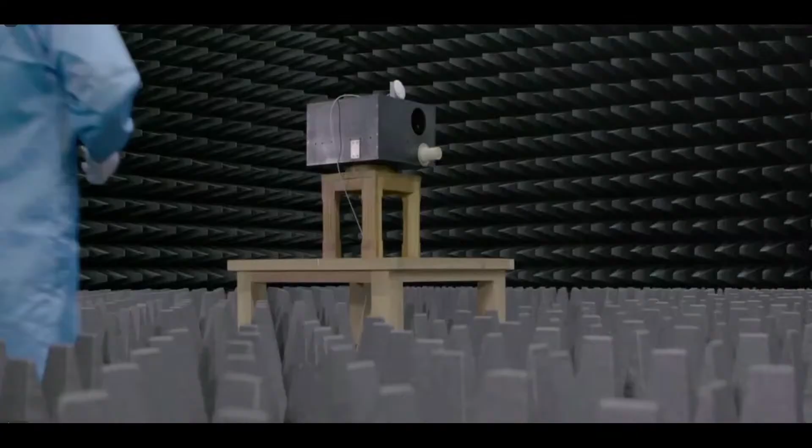Riset adalah kekuatan untuk kita bisa menembus segala keterbatasan. Inovasi adalah visi yang kita segerakan untuk masa depan. Kita tidak bisa sendiri. Kita harus bersama untuk membuatnya menjadi nyata.

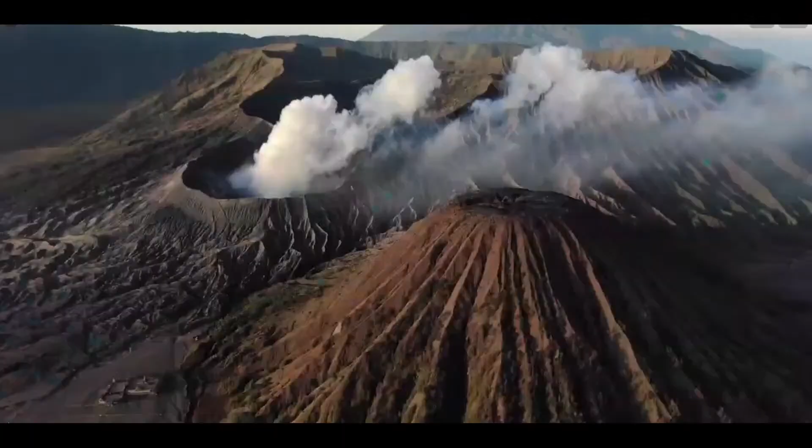Kita tumbuh di bumi Indonesia, tempat yang magis dan penuh keajaiban. Terbentang di antara dua benua dan samudra, kaya akan keanekaragaman kultur dan biodiversitas. Indonesia dan kita adalah paduan yang dibutuhkan untuk mewujudkan visi besar di masa mendatang.

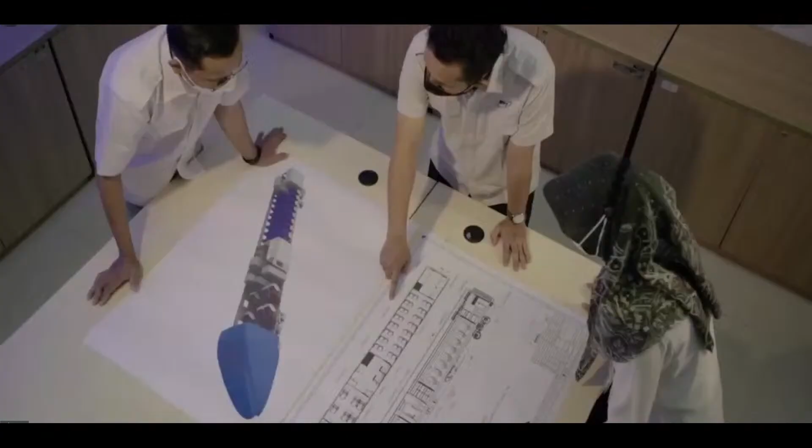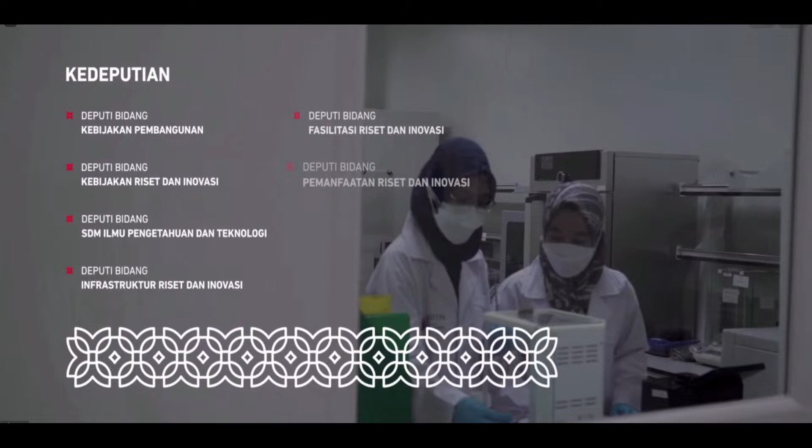Layaknya sebuah orkestrasi, Badan Riset dan Inovasi Nasional atau BRIN hadir mengharmonisasikan berbagai kegiatan penelitian, pengembangan, pengkajian, dan penerapan, serta mensinergikan riset dan inovasi di Indonesia. Membentuk ekosistem yang terdiri dari 7 kedeputian, 12 organisasi riset, dan 85 pusat riset, di antaranya:

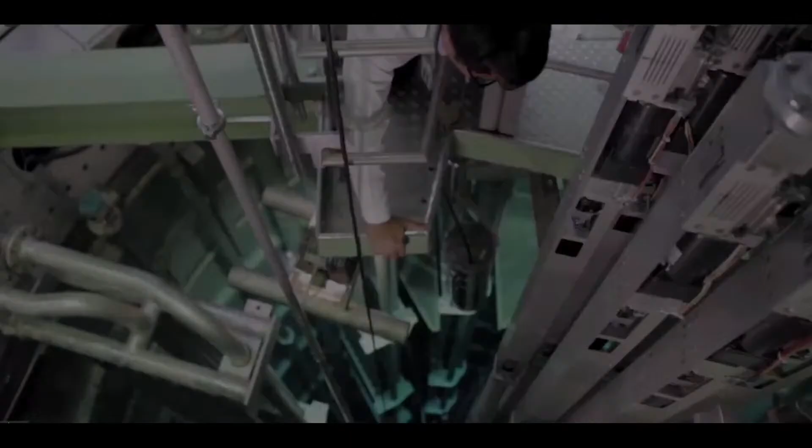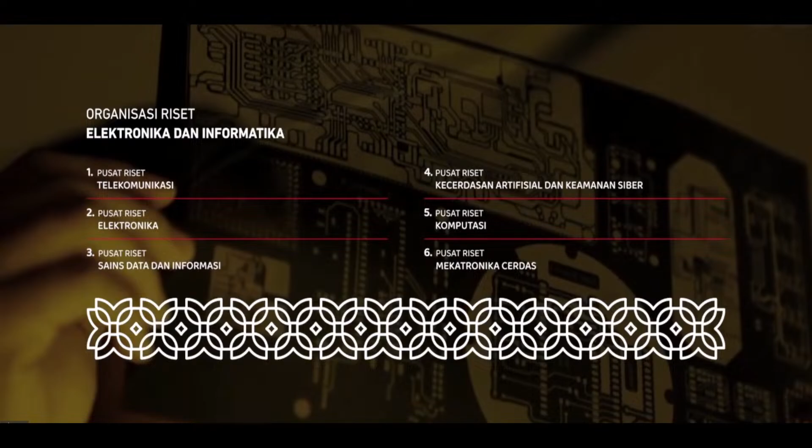Organisasi riset penerbangan dan antariksa, organisasi riset tenaga nuklir, organisasi riset energi dan manufaktur, organisasi riset kebumian dan maritim, organisasi riset hayati dan lingkungan, organisasi riset elektronika dan informatika, organisasi riset ilmu pengetahuan sosial dan humaniora, organisasi riset arkeologi, bahasa dan sastra, organisasi riset kesehatan, organisasi riset nanoteknologi dan material, organisasi riset pertanian dan pangan, organisasi riset tata kelola pemerintahan, ekonomi, dan kesejahteraan masyarakat.

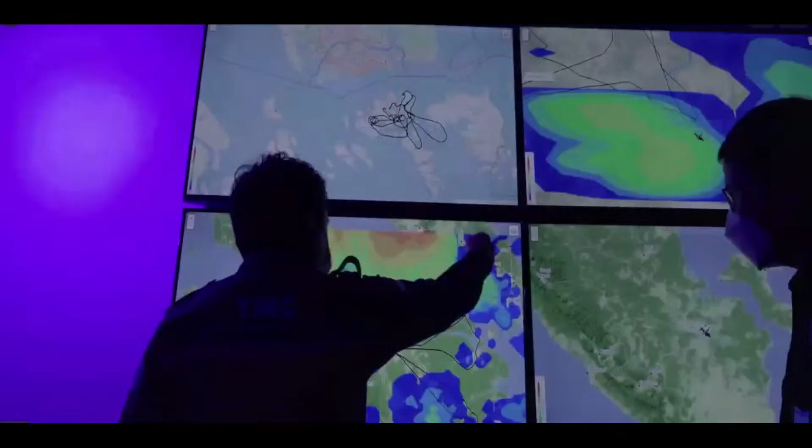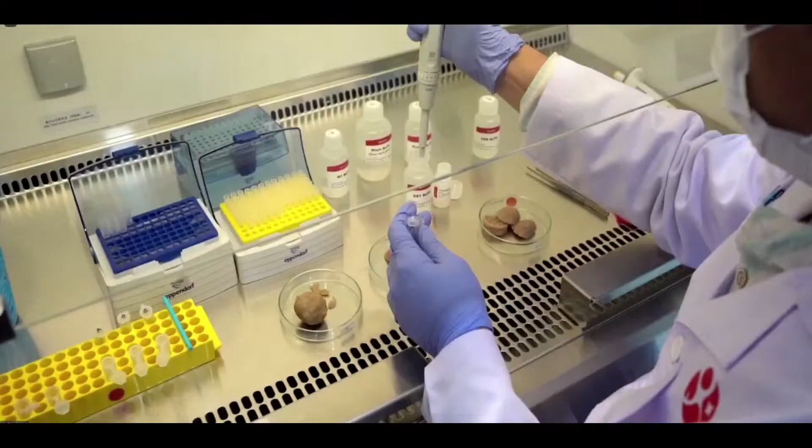BRIN juga mendorong riset dan inovasi menjadi ekosistem Indonesia yang maju dan berkembang dengan 2 sasaran utama. BRIN menyadari potensi luar biasa putra-putri bangsa dalam bidang ilmu pengetahuan dan teknologi. Untuk itu, berbagai kebijakan riset dan inovasi diarahkan untuk menghadirkan kompetensi SDM iptek terbaik, menghasilkan berbagai program unggulan sebagai bentuk komitmen BRIN terhadap periset, inovator, serta masyarakat luas dari berbagai disiplin ilmu di seluruh negeri.

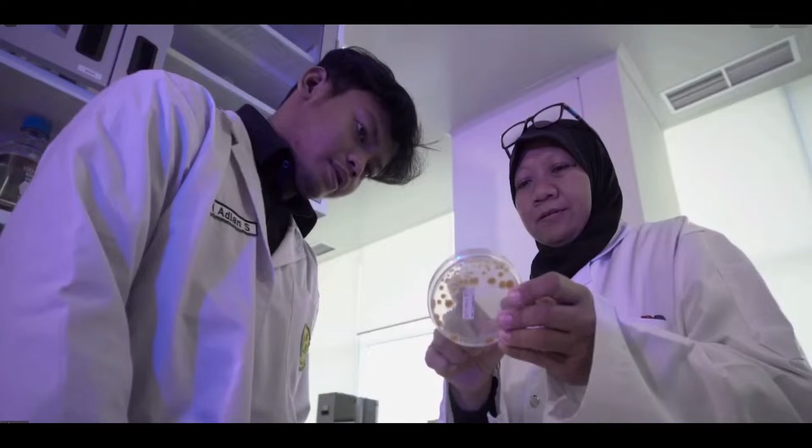Peningkatan kualitas ekosistem riset dan inovasi di Indonesia juga tercipta melalui kolaborasi dengan berbagai kementerian, lembaga, industri di dalam negeri, dan pemerintah daerah, di antaranya dengan dibentuknya Badan Riset dan Inovasi Daerah atau BRIDA. Selain itu, kerjasama dengan berbagai lembaga riset di luar negeri juga terus didorong melalui partisipasi aktif sebagai anggota dalam berbagai organisasi dan forum internasional.

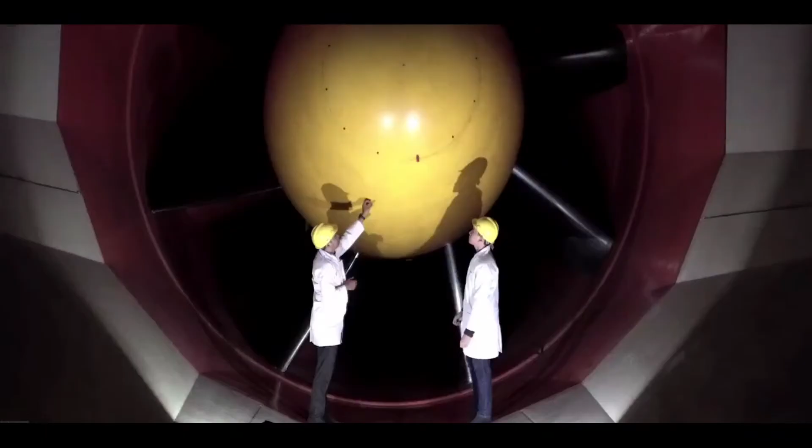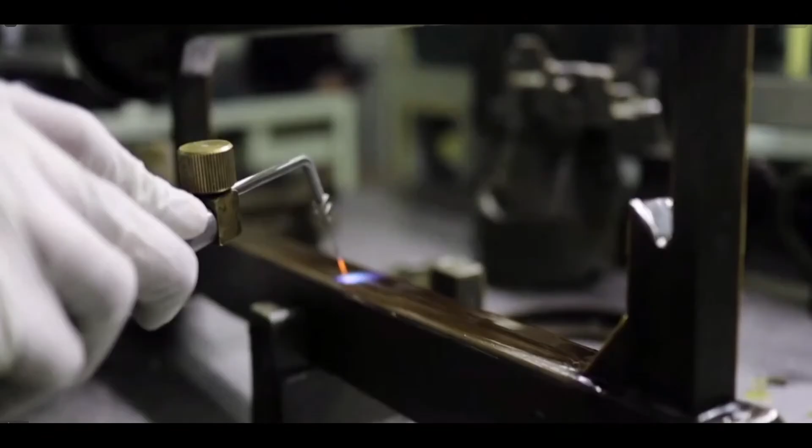BRIN menata alur riset sehingga lebih efektif dan efisien dengan mengintegrasikan sumber daya manusia, infrastruktur, dan anggaran dari berbagai lembaga litbangjirap. Berorientasikan prioritas riset nasional, BRIN melakukan evaluasi secara komprehensif untuk setiap percepatan yang tengah berjalan.

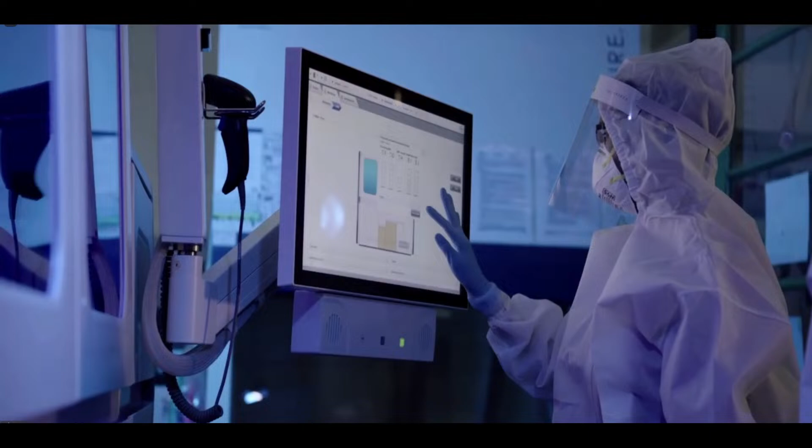Upaya tersebut didukung melalui pengelolaan berbagai fasilitas riset dan inovasi yang tersebar di 17 provinsi di Indonesia, dan akan terus bertambah mengikuti perkembangan kemajuan iptek.

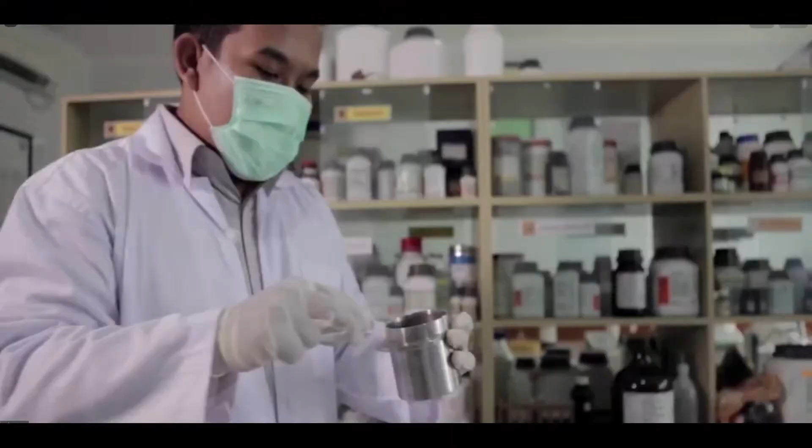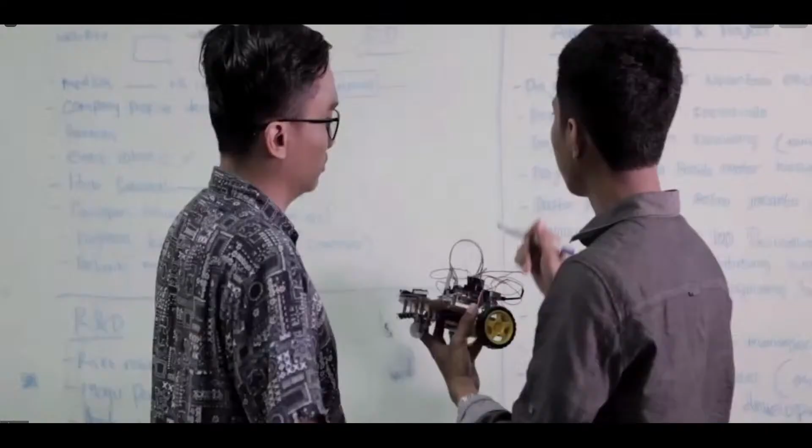BRIN terus meningkatkan kontribusi riset dan inovasi terhadap pembangunan nasional melalui pembangunan dan revitalisasi 4 kawasan sains dan teknologi atau KST. Sebuah kawasan terintegrasi berupa fasilitas laboratorium riset, laboratorium pengujian, fasilitas industri baik startup maupun UKM pada skala kecil atau uji coba, ruang kantor tenan, coworking space, ruang pertemuan, ruang pameran, dan fasilitas pendukung lainnya.

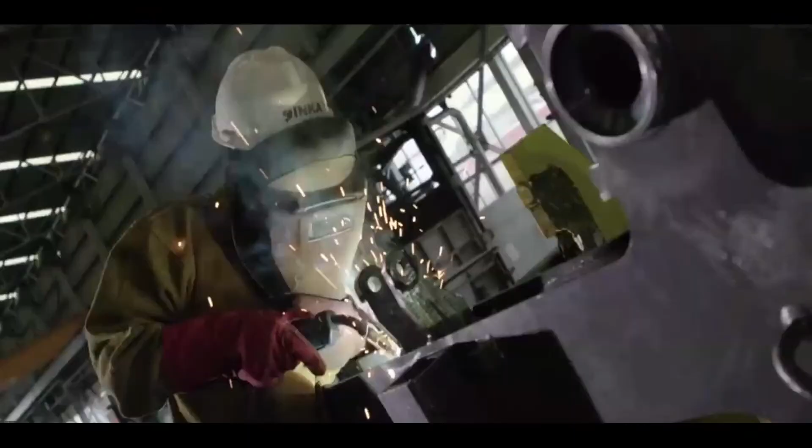BRIN hadir untuk mewujudkan cita-cita menuju Indonesia Emas 2045, melalui konsolidasi sumber daya iptek, menciptakan ekosistem riset, dan fondasi ekonomi berbasis riset, menjadikan Indonesia sebagai rujukan dunia dalam pengembangan dan pemanfaatan ilmu pengetahuan dan teknologi, kebijakan, serta kemanfaatan bagi umat manusia.

Alam adalah sumber inspirasi. Ilmu adalah fondasi dan mengamalkannya untuk kemajuan bangsa.

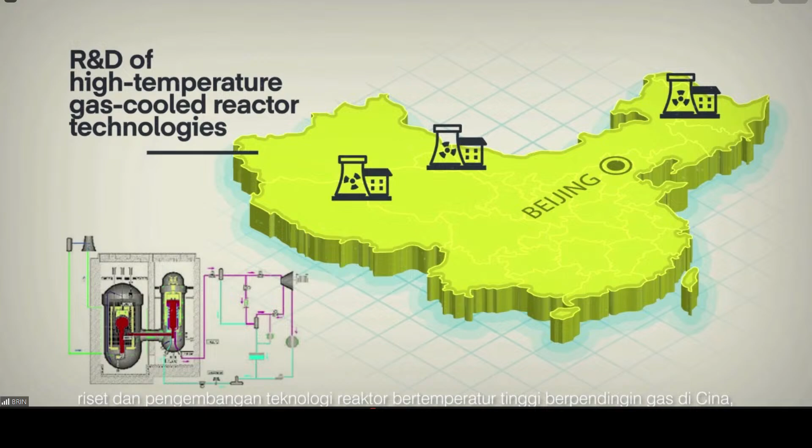Dr. Sun has played a pivotal role in the research and development of high-temperature gas-cooled reactor technologies in China, leaving an indelible mark on the country's nuclear landscape. His main interests lie in the realms of advanced nuclear reactor technologies and nuclear safety.

A former deputy director of the Institute of Nuclear and New Energy Technology, he has also held senior managerial positions in the nuclear industries.

Internationally, Dr. Sun's influence extends to prestigious roles such as serving as a member of the International Atomic Energy Agency's Technical Working Group of Gas-Cooled Reactors, member of the expert group of the Generation IV International Forum, and director of the Nuclear Power Division of the IAEA.

Currently, as a professor of nuclear engineering at Tsing-Hua University, a member of the expert committee of the China Nuclear Energy Association, and a member of national expert committees for ecological and environmental protection and nuclear safety, Dr. Ing. Yuliang Sun continues to shape the future of nuclear technology with unwavering dedication.

Meet Dr. Jun Sun, a distinguished expert in engineering thermophysics and power engineering from the School of Aerospace at Tsing-Hua University in Beijing, China. In 2009, he achieved his PhD and embarked on a remarkable journey at the Institute of Nuclear and New Energy Technology, Tsing-Hua University.

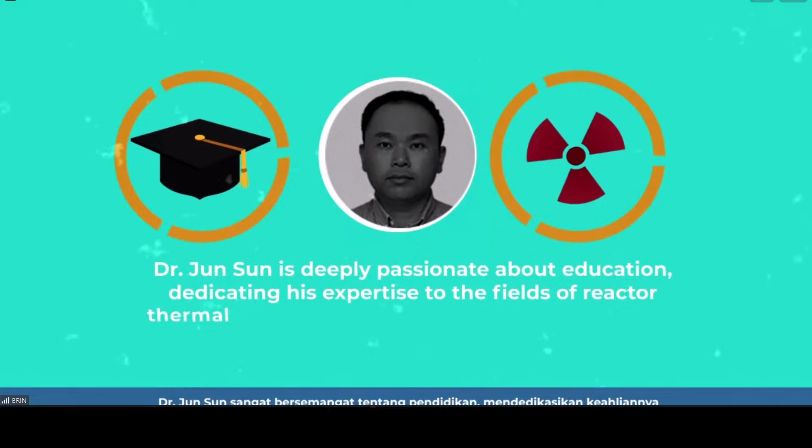Dr. Jun Sun is deeply passionate about education, dedicating his expertise to the fields of reactor thermal hydraulics, nuclear reactor simulators, and advanced nuclear system designs. As an associate professor of nuclear engineering at Tsing-Hua University, he not only imparts knowledge but also serves as a guiding force for aspiring engineers.

Beyond his academic role, Dr. Jun Sun is an active member of the Nuclear Reactor Thermal Hydraulics Branch Council, Chinese Nuclear Society, and proudly represents China in the Education and Training Working Group at the Generation IV International Forum. With his relentless dedication to research and development, Dr. Jun Sun continues to shape the future of nuclear technology in China, leaving an indelible mark on the global stage.

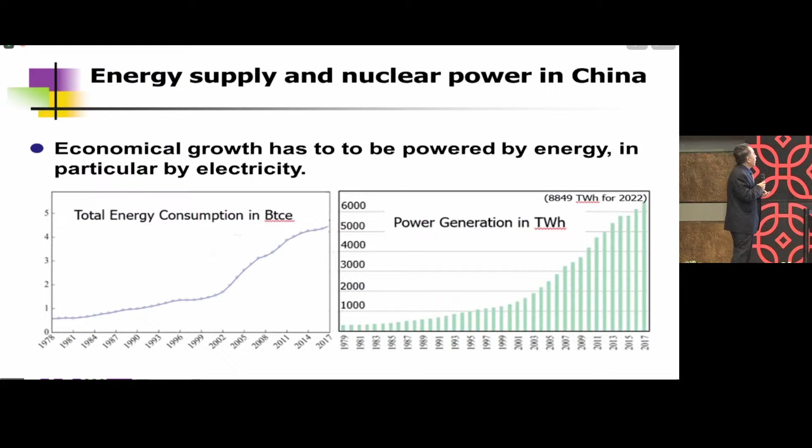Now, securing such a large amount of energy supply faces many challenges. First is to meet the energy demand—you have to have a lot of energy resources to supply that amount. Then there's energy security, to secure the energy supply. Over the years, about 20% of China's energy supply has had to be imported, so we want to be sure this energy supply is always secured.

Thirdly, we have a lot of pressure and challenges in terms of environmental protection and carbon dioxide emission control. This requires great restructuring or structural optimization of the energy supply spectrum. China still depends heavily on coal for energy supply and power generation, and this has to be changed or optimized from the viewpoint of carbon dioxide emission control and zero emission targets.

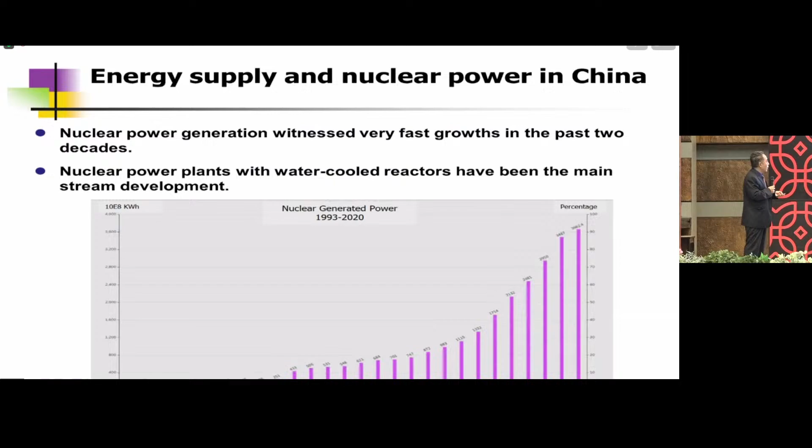Now, some concrete numbers about nuclear power plants. By September this year, 55 nuclear units are under operation, with a total installed capacity of 57 gigawatts, contributing about 4.87% of the total generated power this year from January to September. Also by that time, 24 nuclear units are under construction with a total capacity of about 28 gigawatts, so certainly China has the largest number of nuclear power plants under construction.

And here I think I should congratulate the nuclear industries in China. They have been very successful in terms of good performance building and operating nuclear power plants. We also have today representatives from the nuclear industries—congratulations to them.

Now for the future, it is expected that by 2035, nuclear power may take up to about 10% of total power generation in China, with installed nuclear generating capacity well beyond 100 gigawatts. That is almost certain if nothing disastrous happens in the meantime, for example a severe nuclear accident. If nothing like that happens, nuclear generating capacity will go beyond 100 gigawatts, making China the largest nuclear power generation country.

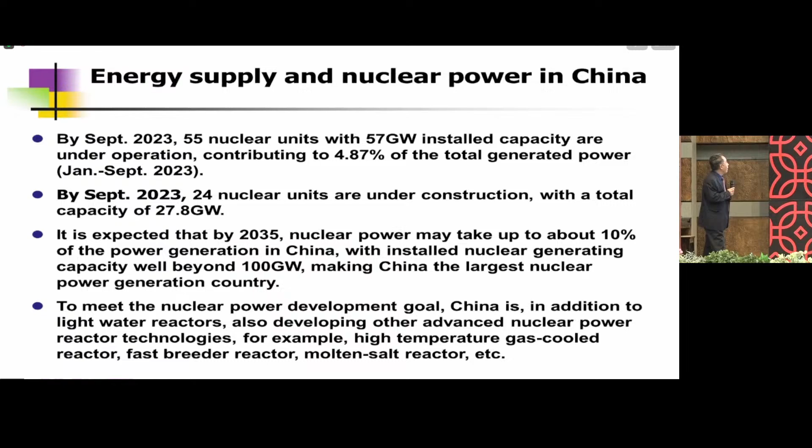These are two very different technologies. What they have in common is they all use uranium dioxide as the original nuclear fuel material. But with the light water reactor, the uranium is cladded by metallic material. With the gas-cooled reactor, the uranium dioxide is cladded by ceramic materials, pyrocarbons, silicon carbide. For coolant, there you have light water, here we have helium. Neutron moderator, there is also the light water, here is graphite. Core structure material within the reactor, there is metal, and here is graphite. So I think we can say these are two very much different nuclear power reactor technologies.

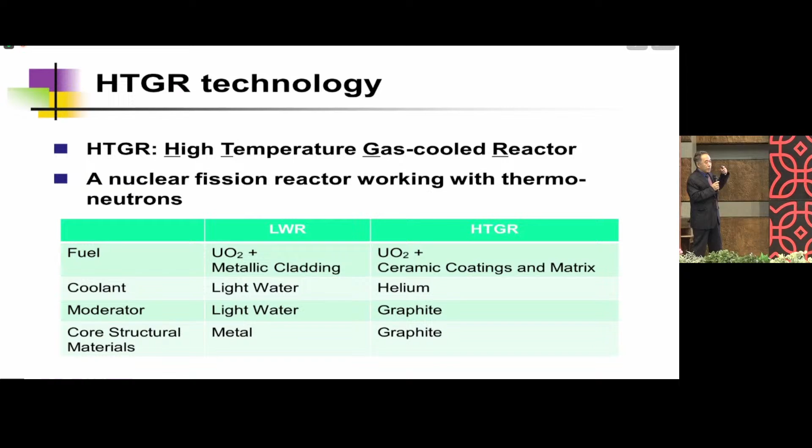The kernel I mentioned is now uranium dioxide, but it could also be other forms of nuclear fuel, with thorium or with uranium-plutonium mix. The three layers we usually talk about are the pyrocarbon layer, the two yellow layers of pyrocarbon, inner pyrocarbon layer, outer pyrocarbon, and the silicon carbide layer in between. These layers are strong enough to retain all the fission products, all the radioactive materials within the coated particle.

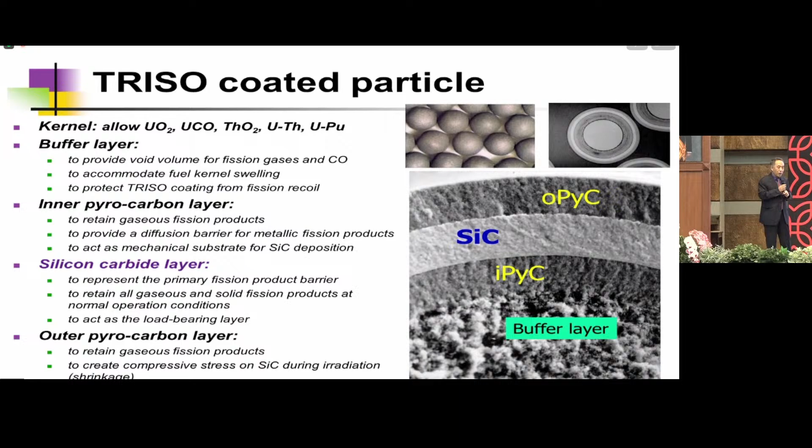These fuels are full ceramic, high temperature resistant, and in normal operation right now, the temperature specification is 1200 degrees centigrade, and in accidental situations, it can stand up to over 1600 degrees centigrade. Within this temperature domain, these coated particles demonstrate very good performance in terms of fission products retention. But it's a different fuel technology, so you need a different fuel manufacturing technology in comparison to the light water reactor fuel technology.

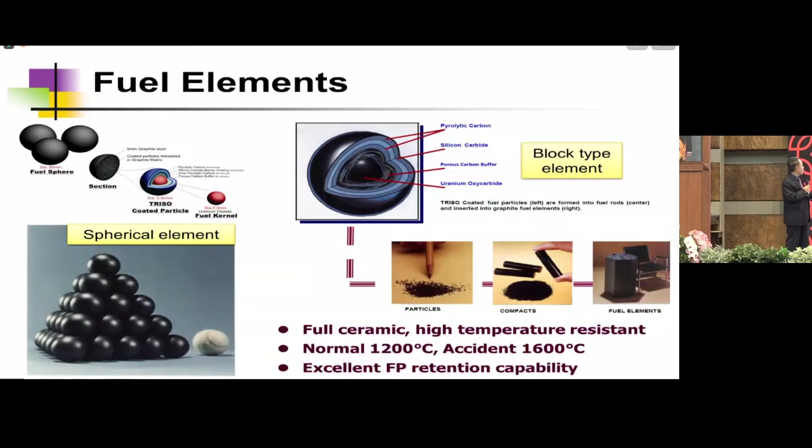So these two reactor fuel element technologies are pursued both worldwide: the spherical fuel element and the prismatic fuel element. The spherical option is pursued more in Germany and currently in China. The prismatic option is pursued more in the United States and in Japan.

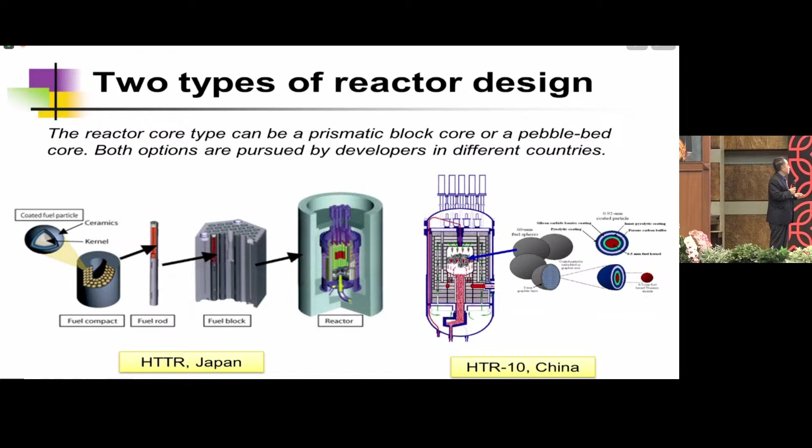Now, the next most important material, helium, working as coolant through the reactor. It's a good gas coolant for reactor application because it is chemically inert, it is not corrosive, it is a single phase gas, stable with varying temperatures, and in terms of neutronics, it is transparent. It does not have a role to play in the neutronic balances, does not absorb neutrons much, and does not moderate neutrons much.

Now the next important material is graphite. Graphite is also a relatively widely used nuclear material, as neutron moderator and as core structure. It has very low neutron capture cross sections, does not absorb neutrons very much, but it has a good neutron moderation capacity, making these neutrons fly much slower.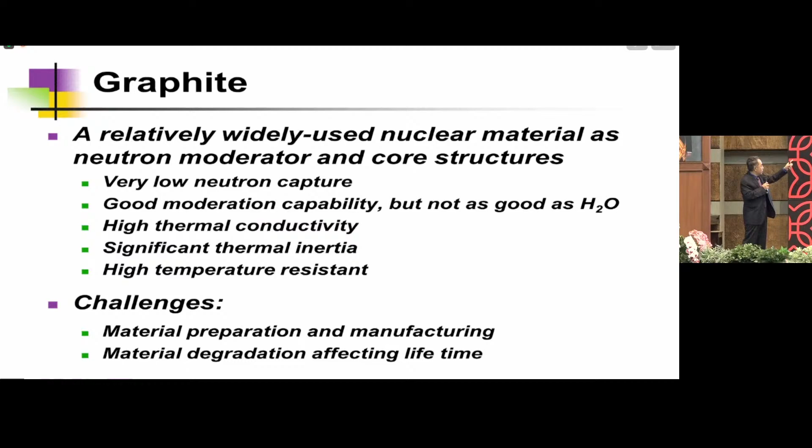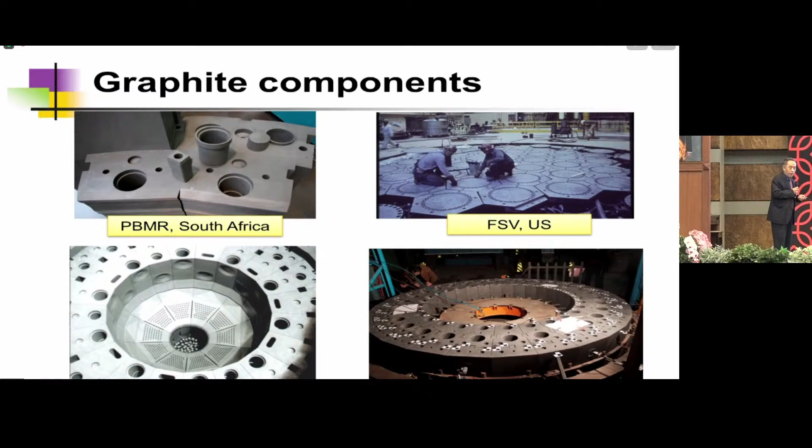From these basic technological choices, we can make some conclusions about the generic technological features of high temperature gas cooled reactors. Almost all of these features come from the selection of materials.

First, a uranium-helium-graphite system can resist high temperature, so you can realize high temperatures from reactor operation. Typical temperature range is 700 to 1000 degrees centigrade. Because of these high temperatures, if you use it for power generation, the power conversion efficiency will be much higher.

These high temperatures also allow for process heat applications at various temperatures. Now, one important neutronic aspect is such a system has a strong negative neutronics feedback effect, which means if you have something abnormal or accidental inside the reactor core, the reactor tends to shut itself down.

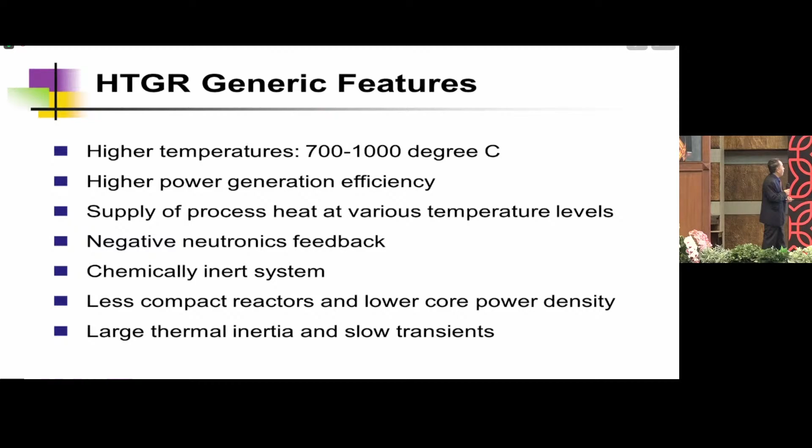Helium gets into the reactor at 100 degrees centigrade and out of the reactor at 2000 degrees. But it's a scientific proposal - that is what scientists can do.

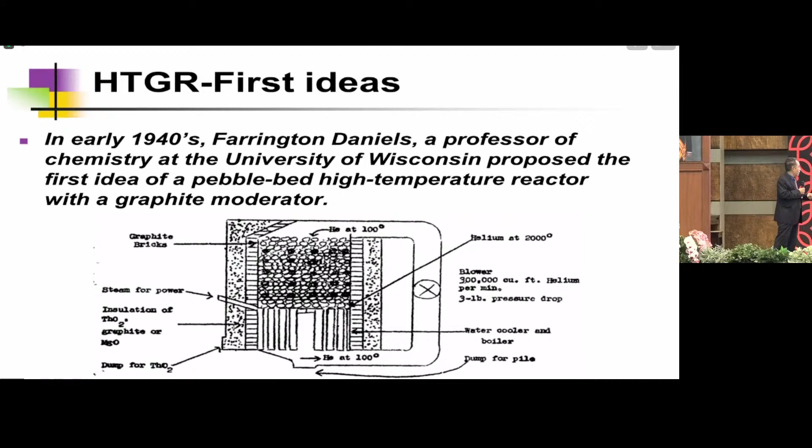With this, I'd like to say high temperature gas cooled reactor has been a concept, a technological option in the world through the years, worldwide. A number of high temperature gas cooled reactors, either testing reactors, experimental reactors, or nuclear power plants, have been built in Britain, Germany, and the United States - even from testing reactors to industrial power plants at the level of about 300 megawatts were built and operated.

Unfortunately, these high temperature reactor facilities or power plants came to a close - almost every facility closed before 1990. After that, Asia took up that technology and started putting resources into its development.

China built a test reactor, and Japan also built a test reactor. Japan's reactor is called HTTR, and the Chinese one is called HTR-10. I will not go into the design specifications more specifically, because I understand you don't wish the presentation to be too long.

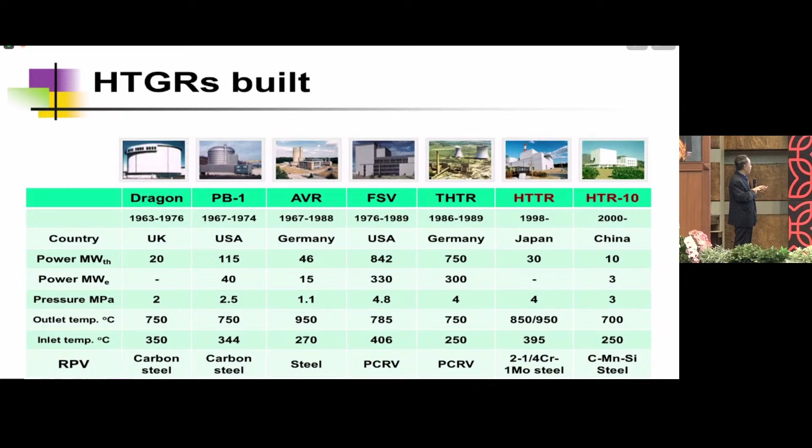I think we can say, or it is a fact, that gas-cooled reactor development has not been as successful as light water reactor technology. They were built in the 1960s and 1970s, operated until the late 1980s, and then came to an end in Germany and the United States, the two primary countries that had spent a lot of resources on this technology's development.

There are complicated reasons for this historical fact, but one important factor is the Three Mile Island accident at the end of the 1970s, in 1979. After that accident, in the early 1980s, gas-cooled reactor people, both in Germany and the United States, thought carefully about how to make nuclear power plants safer. They came up with the modular concept, the modular HTGR concept, to avoid an accident like Three Mile Island, and to avoid a nuclear power reactor having a core melt.

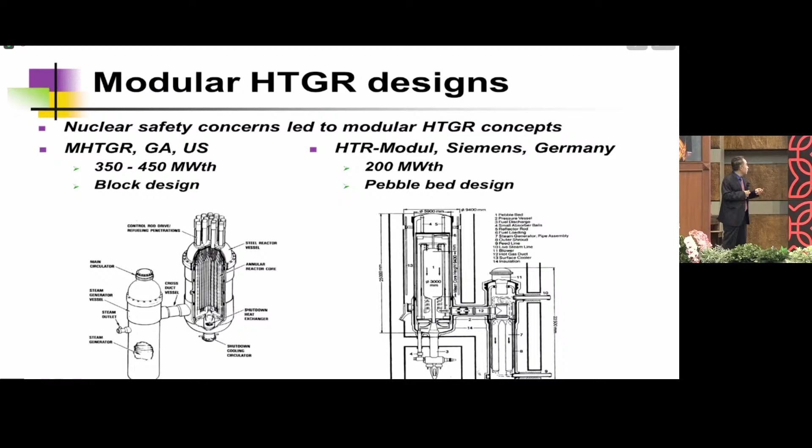Now, what are the key technical features of the modular gas-cooled reactor design proposal? The first most important thing is the reactor would have a lower power rating, lower power generating capacity. It will also have a low power density.

The reactor will have a slim configuration of the reactor core itself. These are basically design choices to allow the reactor heat, after it is shut down, to go out of the reactor by itself, to eliminate the possibility of a Three Mile Island type accident.

And then I call it a descended and separated arrangement of the steam generator from the reactor. The reactor and steam generator are arranged separated, not one over the other or underneath. They are separated basically to separate the helium environment and the water-steam environment. As you know, in the steam generator you have water and steam, and in the reactor you have helium. In such an arrangement, you can better separate the two working environments.

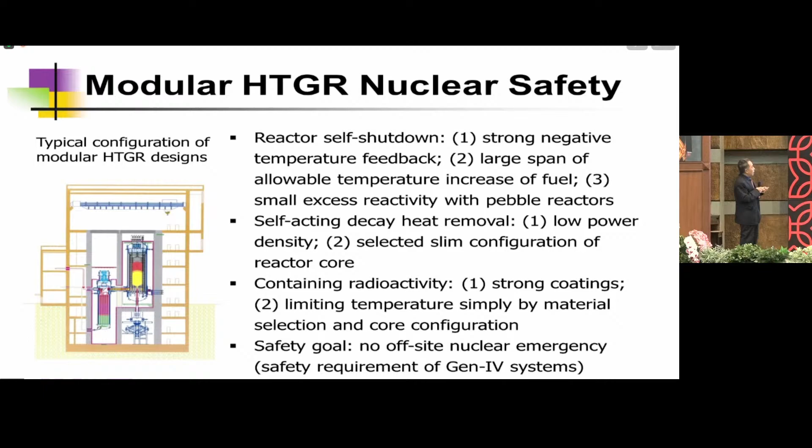I've talked about the worldwide nuclear gas-cooled reactor construction and operations. There were several already realized, and in the early 1980s, the development line went into the modular ideas. The previous gas-cooled reactor plants were later shut down, and projects were unfortunately cancelled. So the whole world follows the idea of modular reactor technology.

Specifically, as I mentioned, Japan built a test reactor with 30 megawatt capacity, and China built a test reactor with 10 megawatt capacity. Both test reactors follow the ideas of modular reactor design. The purpose is also to demonstrate the modular reactor concept. After these two test reactors, I think from our side we are trying to go to the next step for industrial demonstration and commercialization.

But we are also actively participating in the so-called VHTR research and development, which is more a focus in the Generation 4 International Forum.

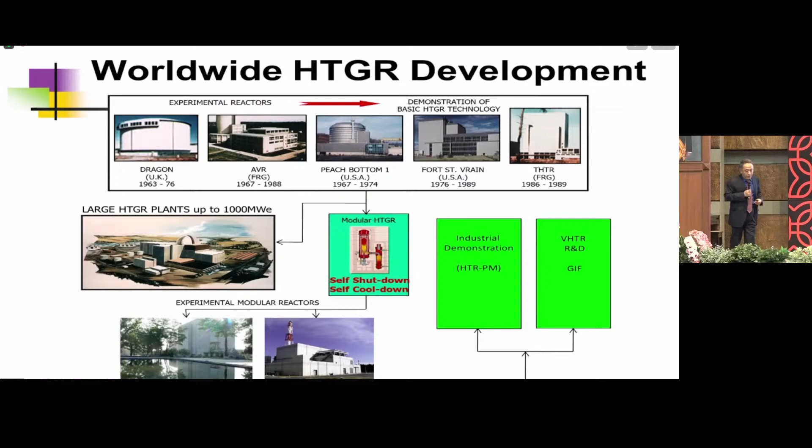Now from the world, let's come to China, which you are more interested in. The roadmap, I think we can say there are three or four major steps which we want to go through until the commercialization of this technology is realized. The first step is research and development, R&D. The second step is to build a test reactor. The third step is to go to industrial demonstration with a prototype power plant, let's say. And the last step is to go commercial.

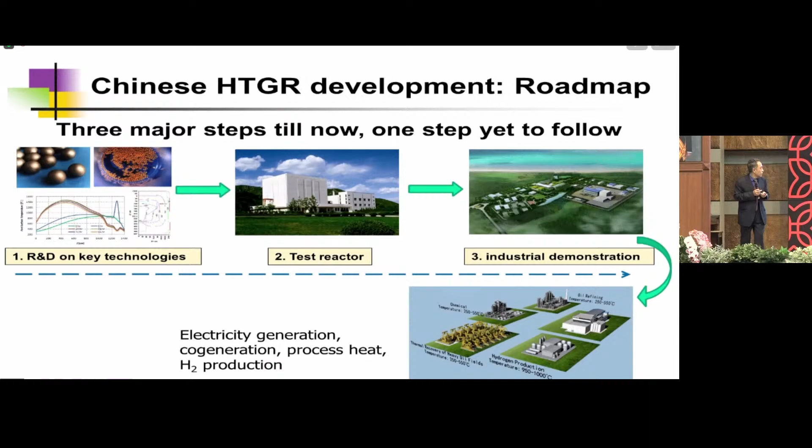In the 1970s, we conducted a lot of research and development work, testing on the vessel, on graphite, on fuel handling, on many things. The development goal at that time was to build a 100 megawatt thorium thermal breeder, and it was a very demanding, challenging goal. Although we didn't build that in the end, we did a lot of experiments.

In the 1980s, as I mentioned, when the whole world went into modular, we also followed the modular concept. We did basic research, modeling, software development, and experimental work on the modular reactor concepts. We developed codes, the computer code system for design analysis and accident analysis.

We also performed application studies for heavy oil recovery, for petrochemical industries, even together with the German industries. There were a lot of bilateral cooperations between Germany and China.

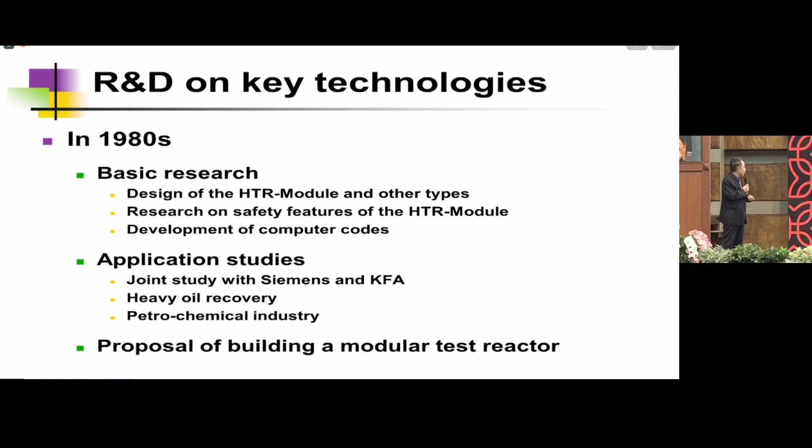And in the 1980s, we proposed to go to the second step, to build a test reactor. The objectives and purposes of building a test reactor are to acquire the experiences of design, construction, and operation, to carry out testing of the fuel, to verify the claimed safety features of the modular gas-cooled reactor, and to demonstrate some application features like cogeneration, combined cycle, and so on. So these were the objectives set at the beginning when we proposed to build the test reactor.

The test reactor idea was included in 1986 into the Chinese National High Technology Program. In 1992, the government officially approved the construction of that test reactor. After that, we started to pour the concrete, to manufacture equipment, to construct and to commission and so on. Until the year 2000, that test reactor went critical, and three years later, in 2003, it went into full power operation.

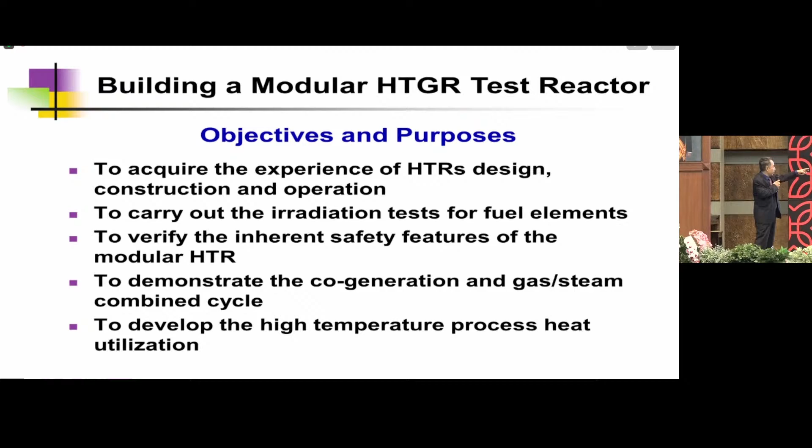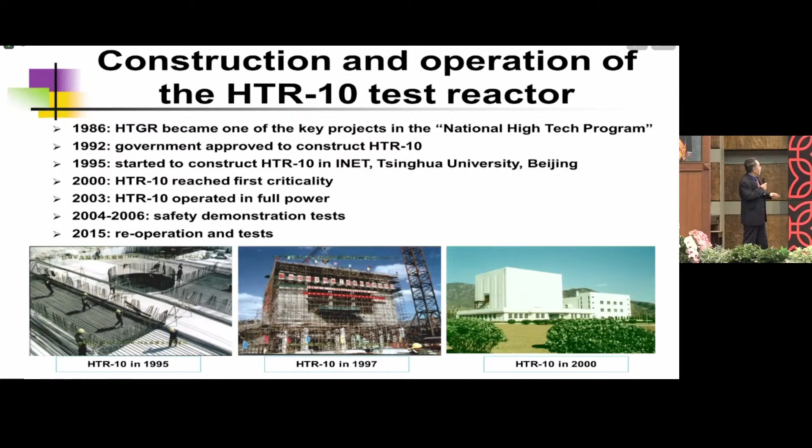Fuel handling, charging and discharging these spheres is a specific technological feature of this type. This is how the fuel handling of these spheres works. You put new fuels into the reactor, discharge the spent fuels. You have to discriminate or separate the spent fuel from other types of spheres like graphite spheres from the reactor. This is a unique system and also a challenging system, requiring a lot of handling.

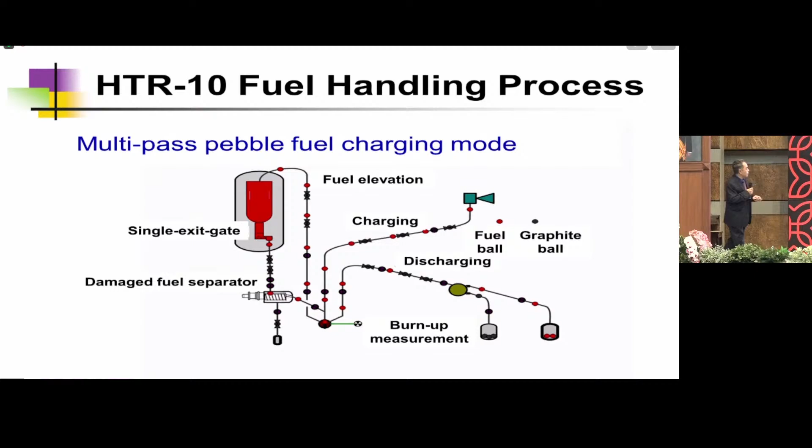The test reactor could operate in several modes. It can generate electricity only, it can also operate in a cogeneration mode with electricity and heat supply, and it can also work by generating only heat without electricity generation. It is a small test reactor, so generating electricity sometimes is not that worthy, in particular from the grid. So many times, very often, it is operated in a mode not generating electricity.

Important with the operation of this test reactor is to demonstrate the safety features of the modular reactor concept, which are the initial objectives of developing modular reactors. So with this test reactor, a number of safety demonstration tests were performed, some even very demanding or challenging accidental situations, like stopping the cooling, or withdrawing the control rods without scramming it. These kinds of safety demonstration tests were performed with this test reactor.

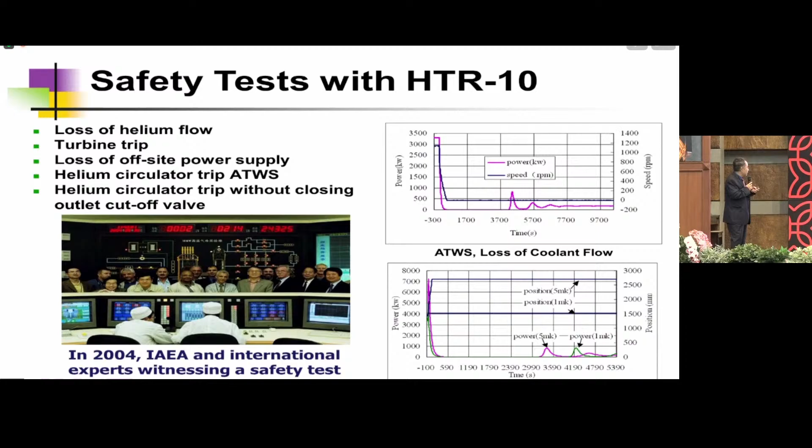To summarize the experience or lessons we have learned from the test reactor, I think we can say we were very successful in the fuel technology development. The fuel in the test reactor was manufactured by our institute, a group of fuel people, and we have collected good experiences with the plant technology, with the systems and the equipment. We have performed meaningful, very useful safety demonstration tests, telling the world, telling the general public, telling the government officials that this reactor type, in its modular design, does possess these safety features.

Through that test reactor, we have also been successful in terms of capacity building, people doing research and development, engineering, manufacturing of the industries, commissioning, operation, and maintenance. I think that was a very successful experience. The test reactor helped us a lot in acquiring this technology, acquiring the necessary people, necessary experience, so that we can go on to the next step.

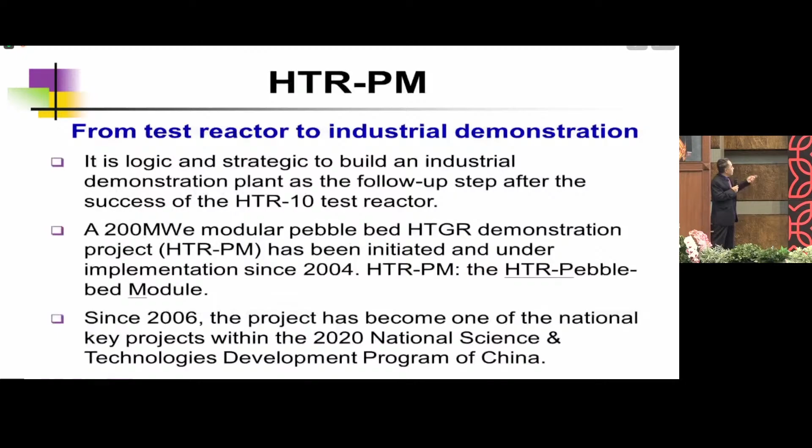Now these are design specifications of that demonstration plant, which we call HTRPM, High Temperature Reactor Pebble Bed Module. That is what HTRPM stands for. Within this demonstration plant, we have 2 reactors, 2 steam generators being connected to 1 steam turbine. That is basically the idea of a modular power plant. When I need a larger capacity of the plant, I build more reactor modules. In this specific case, we have 2 reactor modules. I don't want to go into the detail of the design specifications. That was the idea of the demonstration plant.

The construction site, some of you maybe visited that site. It is in Shandong, on the coastal side in the Shandong Peninsula, 1 hour flight from Beijing.

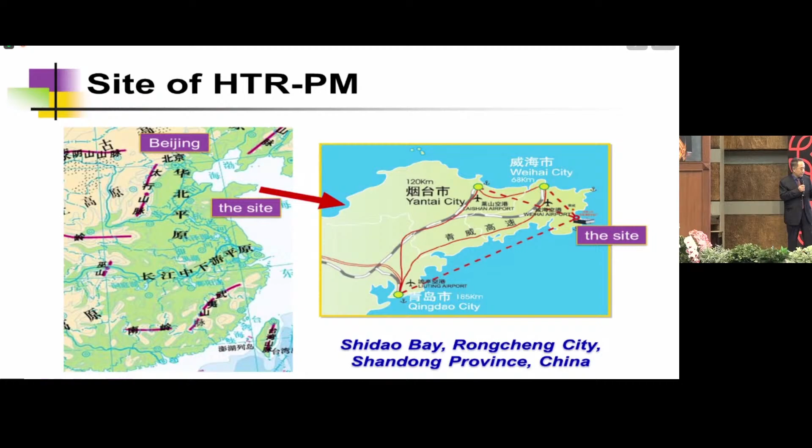From the test reactor to industrial demonstration, that's a big step. You can imagine: the test reactor is 10 megawatt, the demonstration reactor is 250 megawatt. So that's 25 times larger in terms of capacity. So we need to do a lot of verification to demonstrate that the engineering, the design, will work, would be correct, would work in real operational conditions.

So we built an engineering lab, and in the lab we built a 10 megawatt helium loop. With this helium loop electrically heated, we can perform experiments, testing of various designs, of control rods, of steam generator, of helium blower, of all of these things, fuel handling and so on, with the real temperature, real pressure, the real reactor operational conditions. So we do a lot of verification.

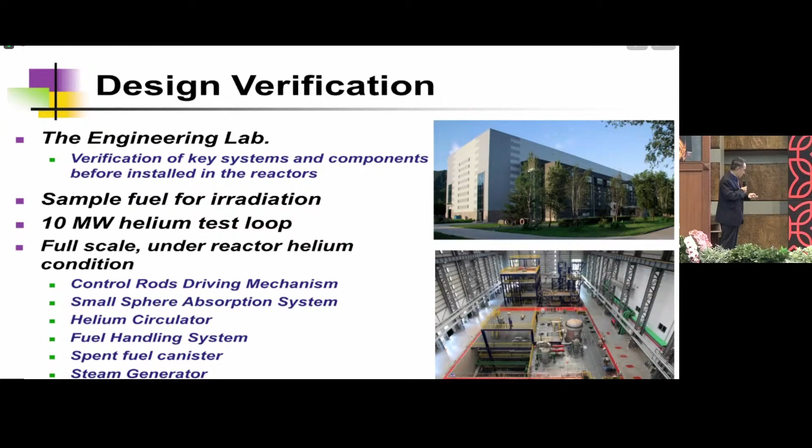Fuel, also, we established a new production line of the fuel and produced sample fuels for the demonstration plant. And these are experimental rigs, test facilities for the systems that I've just mentioned.

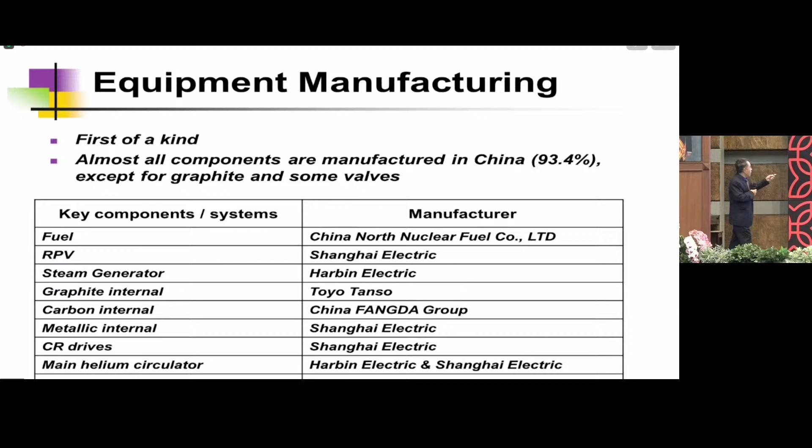Equipment manufacturing: most of the equipment components are manufactured in China, with the exception of the graphite blocks, which come from Japan's Toyo Tanso company. Fuel production has been a successful story. Our institute developed the whole process, the production line, production technology, and then we transferred this production technology to industry. Now the fuel elements are being produced by industries, not by our institute at a university. These are the irradiation results of our fuel performing excellently.

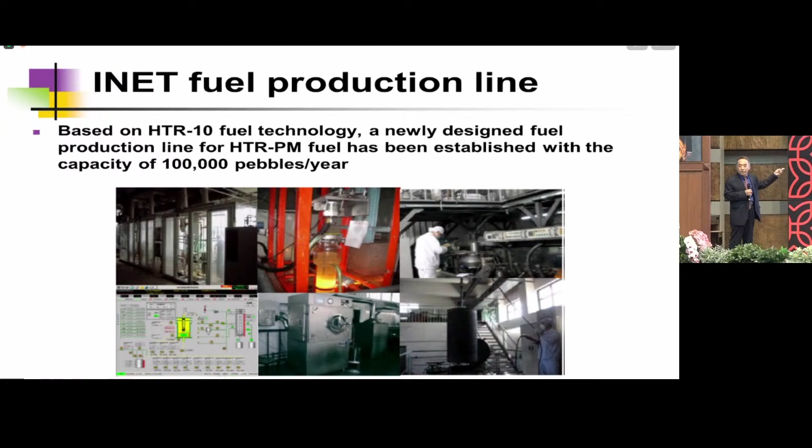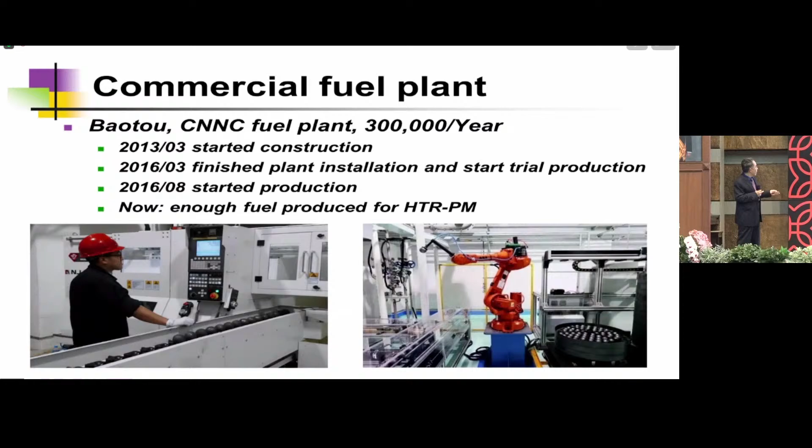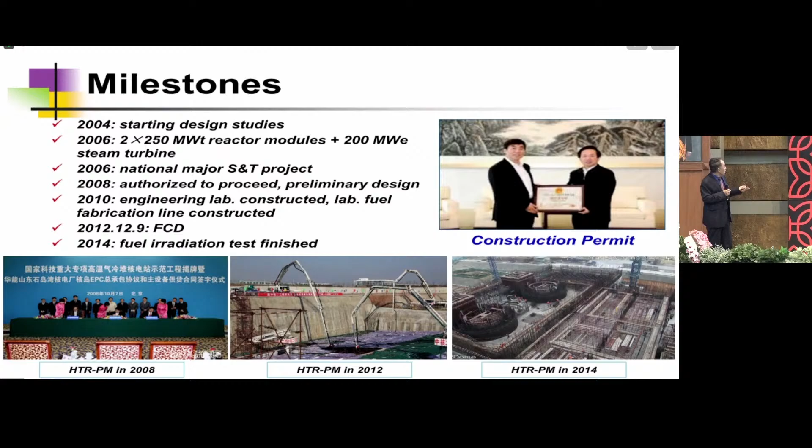What is the current situation? Since 2020, we came to the commissioning stage of that demonstration plant, from cold testing to hot testing, fuel loading, turbine testing. So all of these are commissioning activities.

From last year until now, the effort is to operate that demonstration plant at full power, step by step, under the supervision of National Nuclear Safety Administration. Last December, the two reactor modules reached 200 megawatt thermal. The full power rating is 250, so that is a process we are now undergoing.

This year is about commissioning and preparation planning for full power operation, as I just mentioned. Now that was basically a review of the demonstration step, from research to testing to demonstration. And now I come to the next step: commercialization.

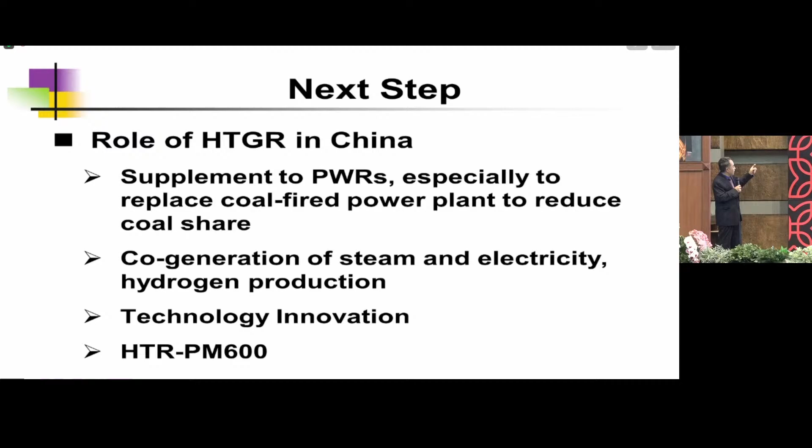Before I start the commercialization step, I think we, as the developer of that technology, have to position this gas-cooled reactor technology in an appropriate, reasonable way. We think the mainstream of nuclear power in China is light water reactor technology, so the gas-cooled reactor is a supplement to light water reactor. It is specifically suitable to replace coal-fired power plants, reducing the share of coal and optimizing the energy structure, and it's suitable for cogeneration of steam and electricity for process heat application.

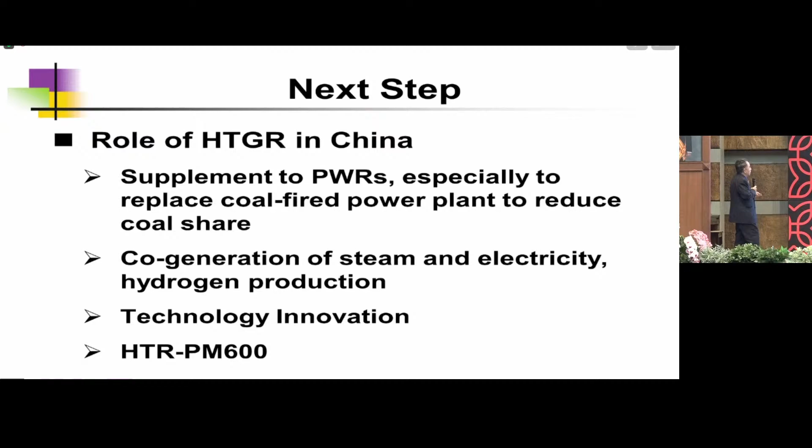Based on these considerations, we came to a design of a 600 megawatt plant, which we call HTR-PM 600. That would use the proven technologies we got from this demonstration project and will be promoted in suitable marketplaces. Right now we have several projects under preparation of this 600 megawatt plant design.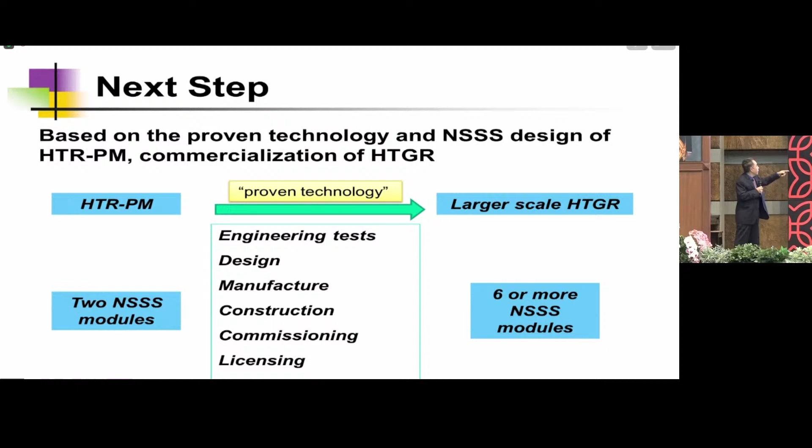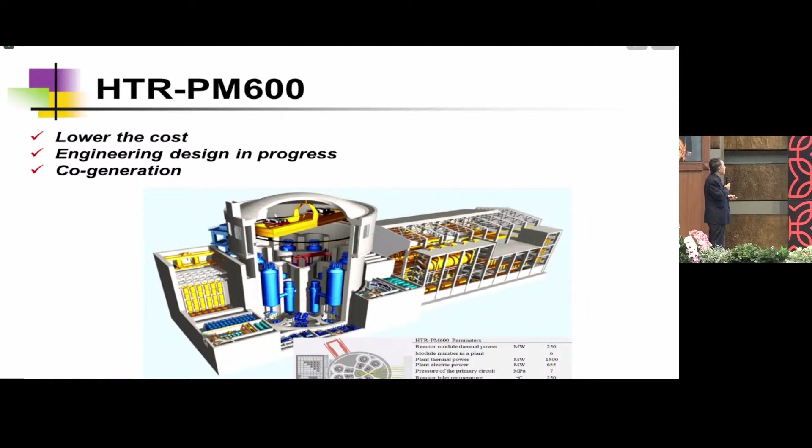Now, as a research and development institution of the university, we are not doing only industrial effort, but also spending a lot of effort on research and development for more technological advances, like using a supercritical steam generator to further increase power generation efficiency, our gas turbine technology, and hydrogen production technology. So our institute, what I mentioned has been mainly the industrial line; now the research and development line, we are also following with these tasks, for example.

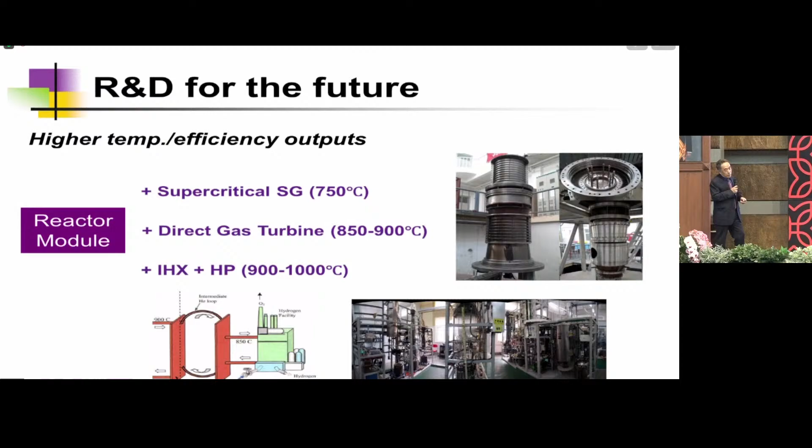As I promised, I have a few slides about international cooperation. Through the years, we have always been very positive and active toward international cooperation in many forms, and this helps us a lot in many aspects. For example, with IAEA activities, doing coordinated research, benchmarking, and so on.

Generation 4 forums - I mentioned we had a lot of cooperation with Germany, with the German institutions and even individuals. We also have other bilateral collaborations such as with Japan, USA, EU countries or institutions, etc.

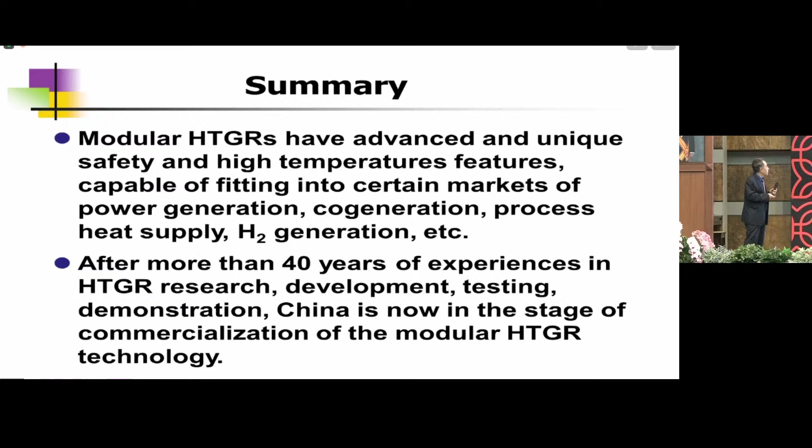Now, to reflect, what are the factors which are essential, which are important for our development in China of the gas-cooled reactor technology? It has been a long history since the 1970s. So we have a lot to reflect, to think about. It's really long.

First important, I personally think, is the demand, the energy demand. If there is no demand, you only have passion. That's not enough. I think energy demand is mostly important, firstly important, and then for nuclear technology development, national policy and governmental support is important, is essential.

Third, persistent, continuous commitment of a development team, because it's a sophisticated task of development. So the team has to be really persistent. And we have to follow the necessary path, the way, in order to avoid big mistakes, failures.

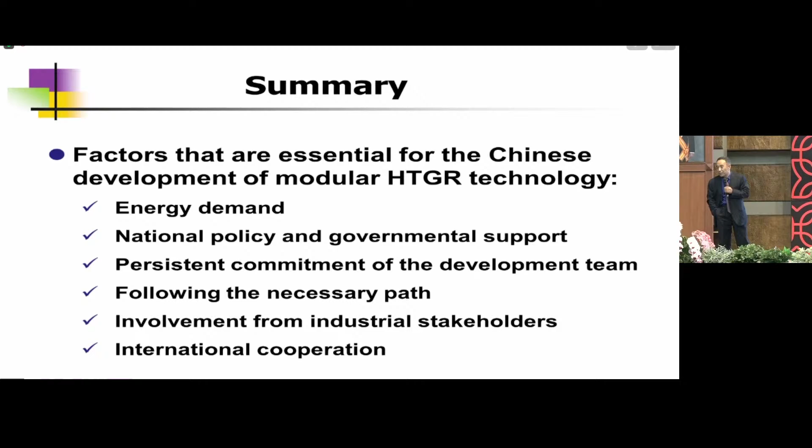And cooperation and involvement from industries or from industrial stakeholders are critical, very important. If you don't have cooperation from the industry, then realizing a real project, industrial project, is impossible. So the industry has to have its interest and its benefit, let's say. Last but not least, international cooperation, that we support each other, help each other internationally. I think that is

The last slide. I thank you all for your kind attention. Thank you very much.